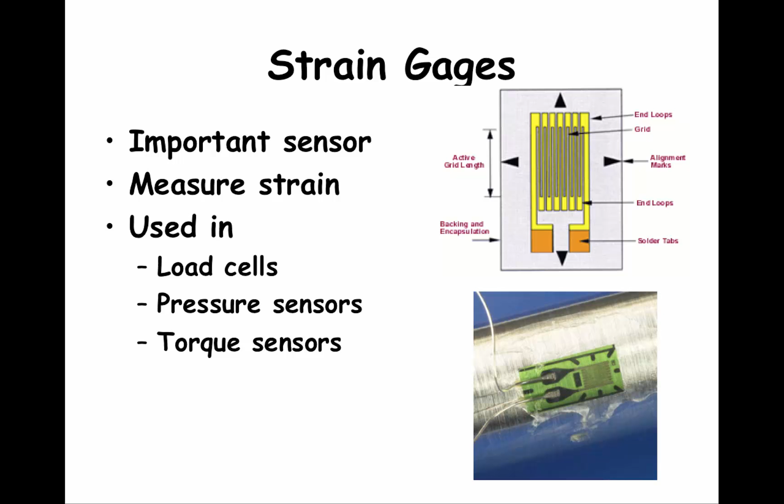Strain gauges are used to measure strain and find the stresses that materials experience using the stress-strain relationships discussed in the previous video. Strain gauges are also used in other sensors including load cells, pressure sensors, and torque sensors. The load cell used in the pressure lab used strain gauges.

Strain is defined as a change in length per unit of initial member length. Strain can be either tensile, where the member becomes longer and thinner, or compressive, where the member becomes shorter and thicker. Strain can be measured using piezoresistive materials, carbon-resistive, and bonded metallic wire.

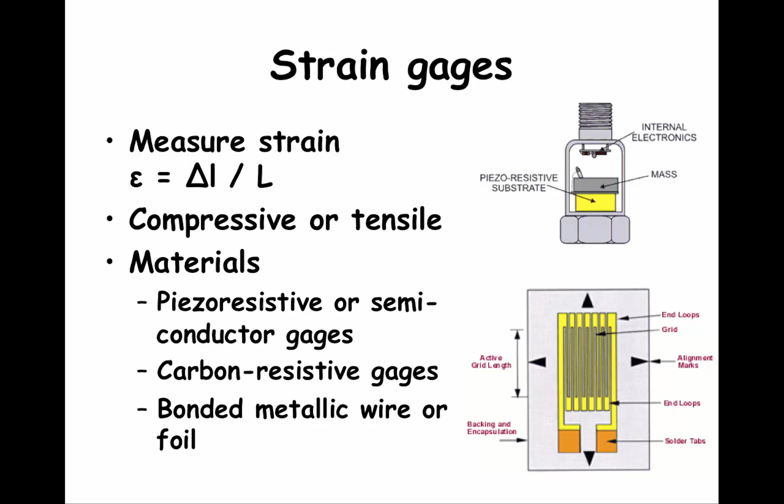Piezoresistive materials came out of the semiconductor industry. They are materials in which the resistance changes when the material is subject to either a stress or a strain. One of the pressure transducers in the pressure lab used piezoresistive materials.

The term bonded describes the fact that the gauge material used to make the active grid is mounted on a backing. Both the backing and the gauge are mounted to the surface at the point where we want to measure the strain. The alignment marks are used to place the gauge over the point where you want to measure the strain. The gauges are aligned to measure strain in the primary direction of interest.

The strain reading will be an average over the entire active grid length. Also notice the solder tabs. This is where small wires are soldered to the gauge so that the change in resistance can be measured.

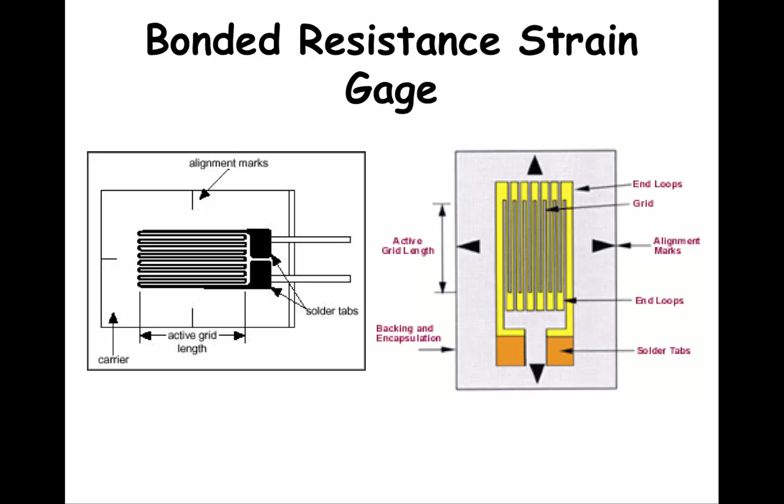The grid lines are like wires, and in some cases are actually wires. The grid lines get thinner when the active grid length is stretched due to a tensile strain. So in tension, the resistance is the initial resistance plus a change in resistance called delta R.

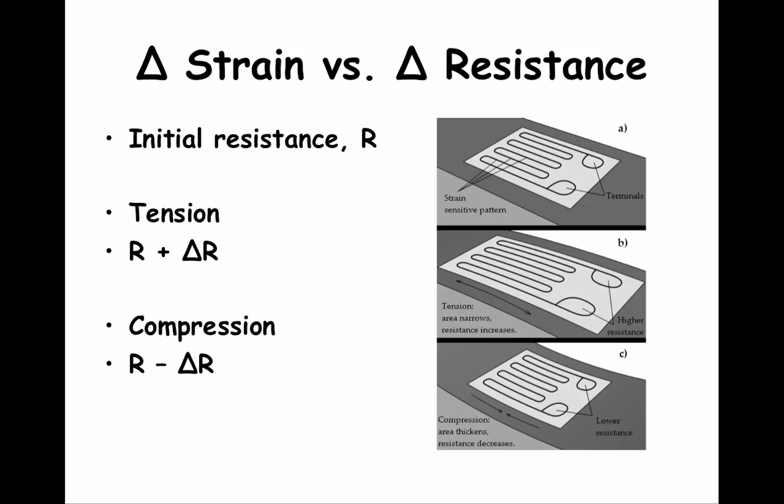In compression, the grid lines get fatter and thicker when the active grid length is compressed due to compressive strain, and the resistance is the initial resistance minus the change in resistance. Again, if the grid gets thinner due to tensile strain, the electrical resistance of the gauge increases. If the grid gets thicker due to compressive strain, the electrical resistance decreases.

The relation between change in resistance and strain is given by the gauge factor of the strain gauge. The gauge factor, capital F, equals delta R over R over delta L over L. The denominator delta L over L is the definition of strain, so the gauge factor equals delta R over R over the strain, given by lowercase epsilon.

Strain gauge manufacturers give us the gauge factor and the initial gauge resistance. We measure the change in resistance, delta R, and can find the strain that caused the change in resistance.

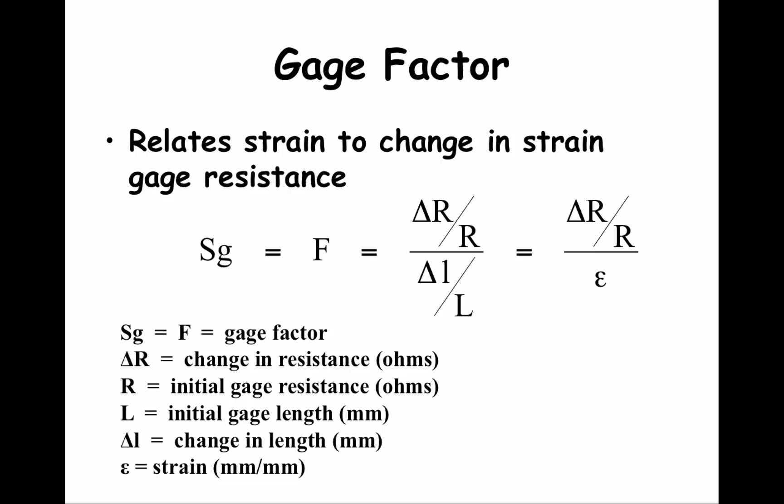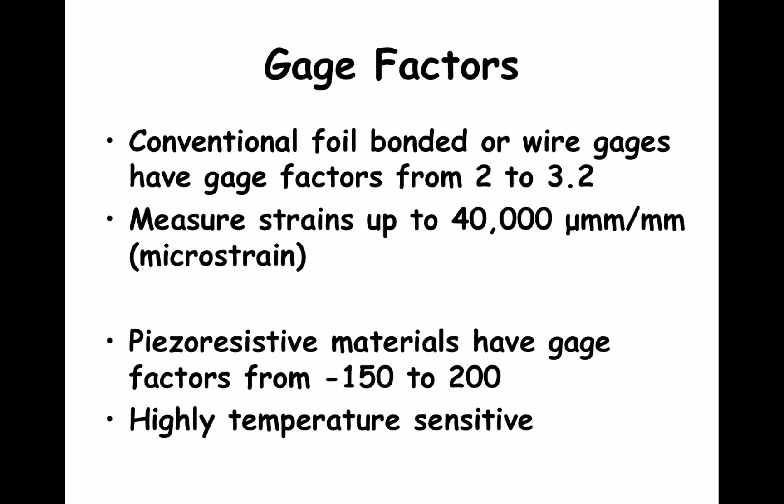Conventional foil-bonded strain gauges have gauge factors from 2 to 3.2. Piezoresistive materials have gauge factors from -150 to 200. The high sensitivity of piezoresistive materials comes with a disadvantage: the materials are highly temperature sensitive.

If you remember, the PDaq 55 and most other data loggers can measure voltage, but they cannot measure resistances and changes in resistance. To convert a small change in resistance to a change in voltage that we can more easily measure, we will use a Wheatstone bridge circuit. We will talk about the Wheatstone bridge circuit next time.

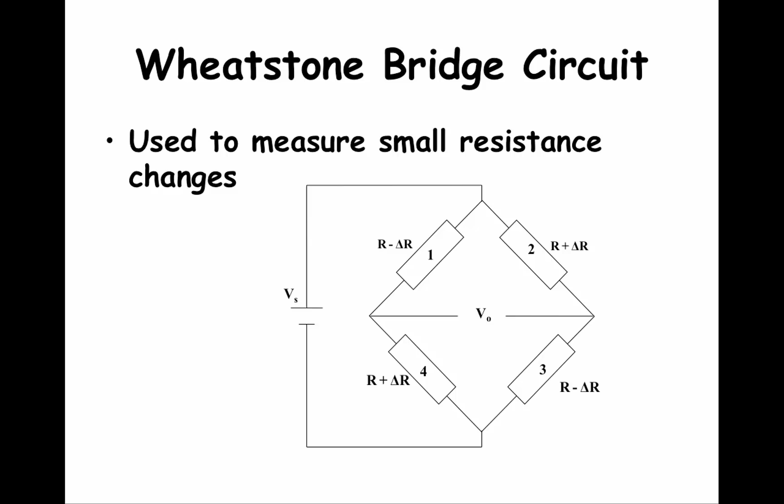Gauge length is important because strain gauges will give you the average strain under the active grid of the strain gauge. So if you want more of an average strain, you might choose a longer strain gauge. If you want the peak strain at a point, you will want to choose a shorter strain gauge.

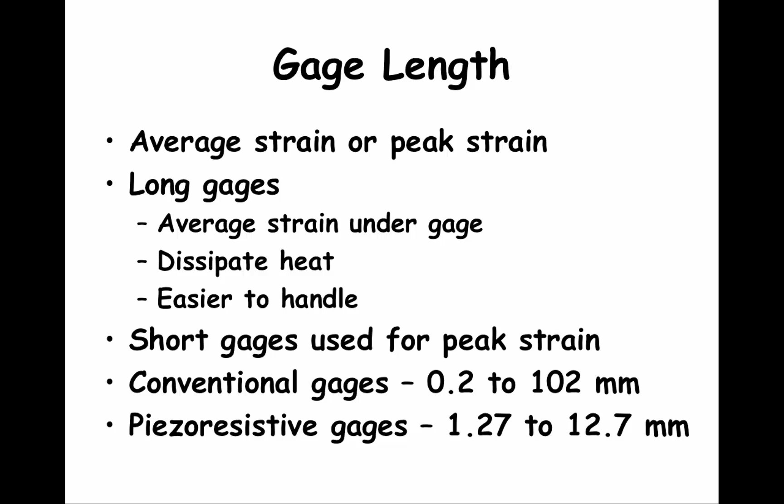Strain gauges can be made using different alloys. Here are 3 common alloys with comments about their strengths.

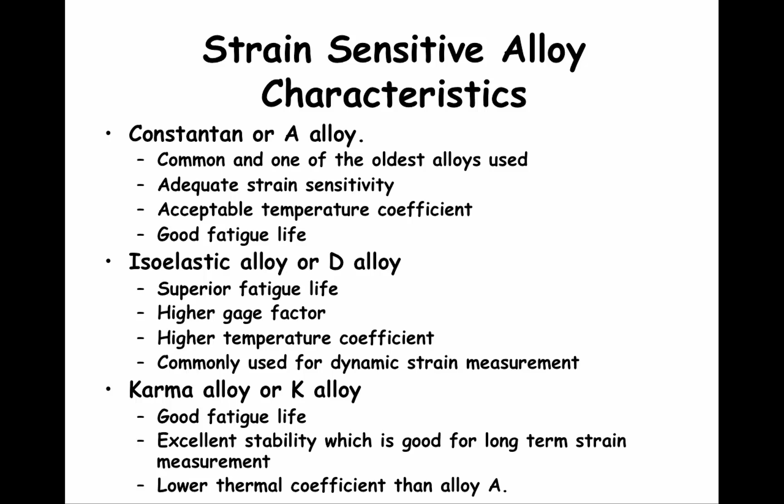Single strain gauges measure the strain along the primary axis of the strain gauge. Sometimes you want to know the strain in 2 or 3 directions. You can buy gauges that have 1, 2, or 3 gauges. A strain gauge with 2 or 3 gauges is called a rosette.

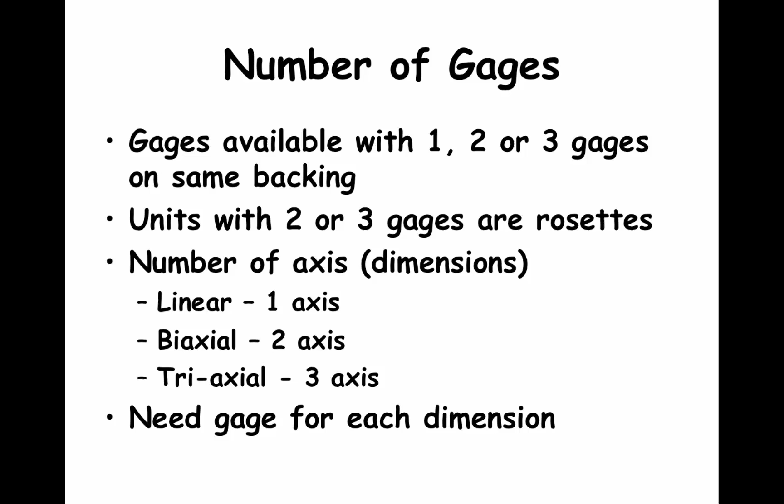When specifying strain gauges, you can specify the length, which we have talked about already, and the width. Wider gauges average the strain over the total length and width of the active grid.

In the previous slide, it was noted that a single gauge measures strain in one direction, along the primary axis of the gauge. But sometimes you want the strain in all 3 directions. To measure strain in 2 or 3 directions, you need to use rosettes.

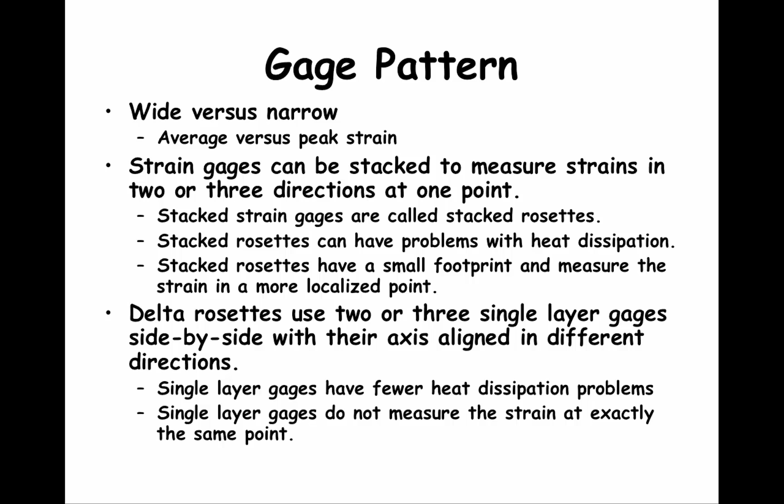There are 2 general types of rosettes. Stacked rosettes put 2 or 3 gauges on top of each other. Stacked rosettes can have a smaller footprint so they can find a more localized peak strain, but they tend to have heat dissipation problems. Each gauge will have some current going through it, and the current will generate heat and an apparent strain. The other rosette type is called a delta rosette.

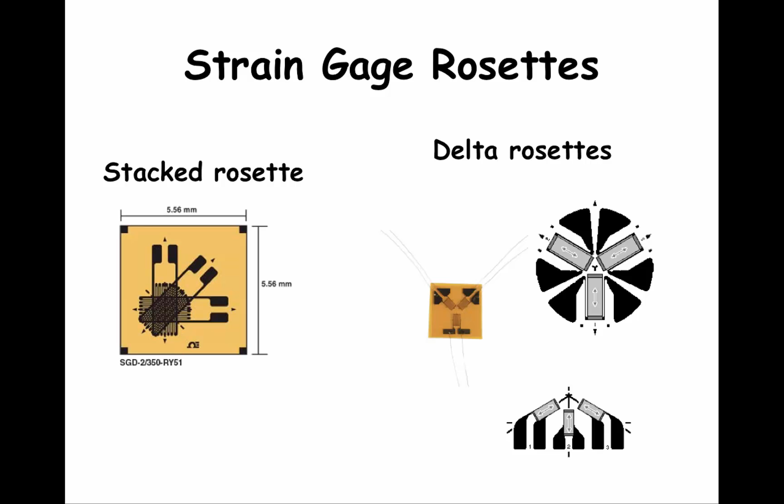Here are figures that illustrate stacked and delta rosettes. Stacked rosettes have the strain gauges stacked one on top of the other, and they measure strain at a localized point. Delta rosettes are side by side, so the strain is not exactly at the same point.

The self-heating that strain gauges have is the same self-heating issue that resistance temperature detectors have when connected to a Wheatstone bridge circuit.

In the previous video, near the end, we mentioned the temperature coefficient of linear expansion. We know from the concepts associated with resistance temperature detectors that resistance depends on temperature. The heat generated by the excitation signal of the Wheatstone bridge circuit will induce an apparent strain due to thermal expansion. Care must be taken when using strain gauges to prevent the gauge from being heated too much.

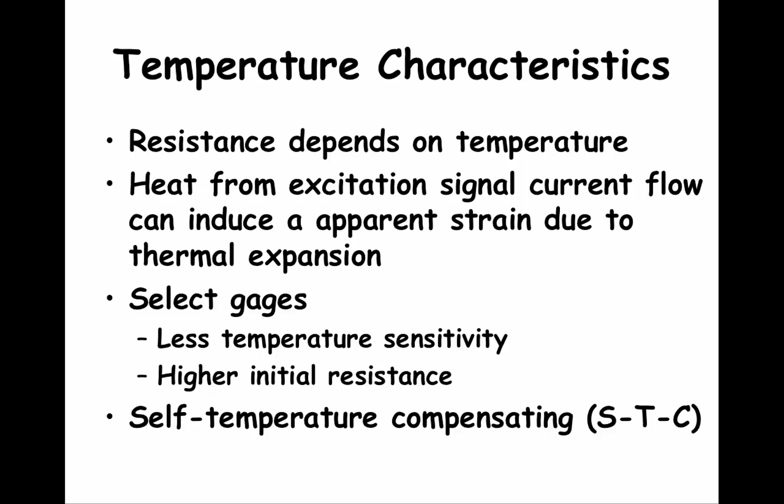Strain gauge heating can be managed by selecting gauges with less temperature sensitivity and a higher initial resistance. Many gauges now come with some self-temperature compensation. Another way to reduce apparent strain due to self-heating is to not exceed the maximum excitation voltage.

Strain gauge fatigue life describes how many times a strain gauge can be strained and unstrained before the gauge has a permanent change in the unstrained resistance of 100 microstrain or more. This permanent change in unstrained resistance is also called a zero shift, and it typically occurs around 1,000,000 strain-unstrain cycles. Fatigue life is important for strain gauges used in other sensors and permanent installations.

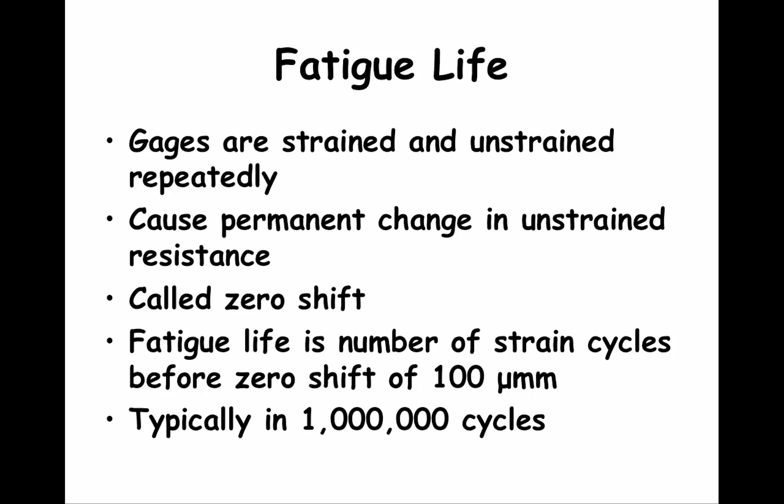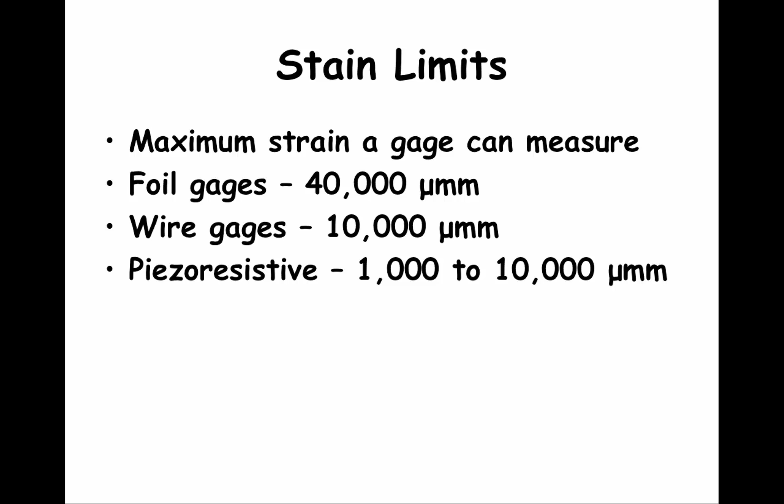Strain gauges have strain limits. Again, strain is the change in length per unit initial length. Piezoresistive gauges have the lowest strain limits, less than 10,000 microstrain.

Noise can be an issue. Shielding the leads and using filters can help manage noise. The apparent strain due to gauge heating can be a problem too. Apparent strain is managed by using compensating gauges, selecting gauges with higher initial resistance, and using the minimum excitation voltage possible.

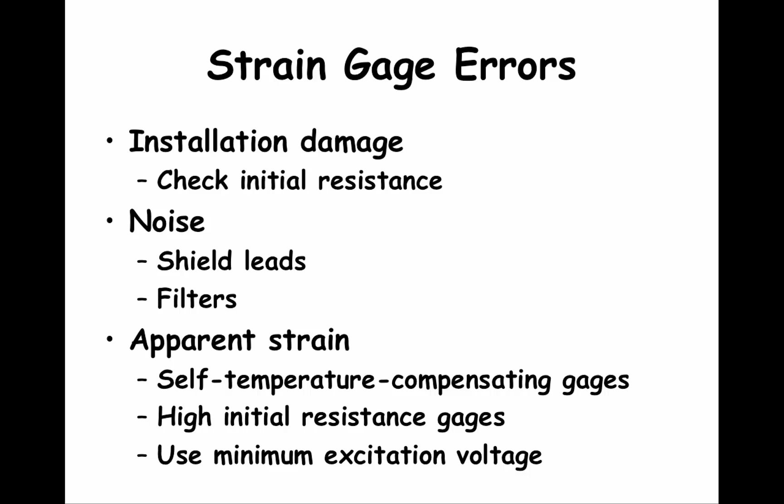Before we wrap up this presentation, I want to talk briefly about load cells. Many load cells have strain gauges inside, and load cells are used widely to measure force, weight, and mass. Load cells come in lots of sizes and shapes and are very rugged.

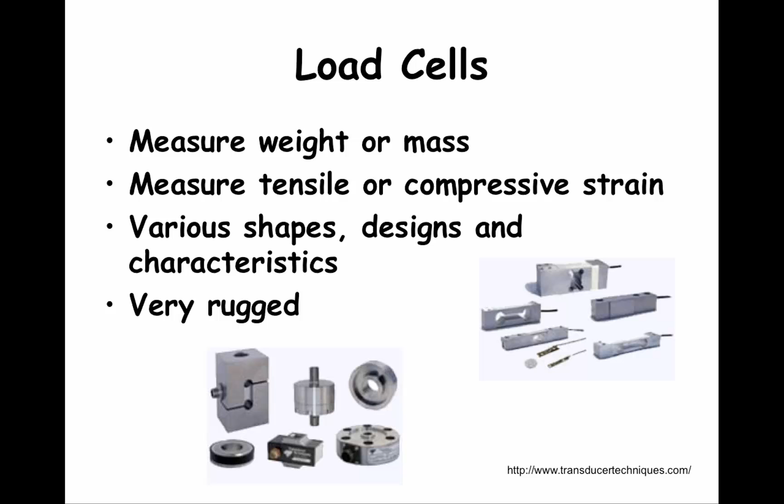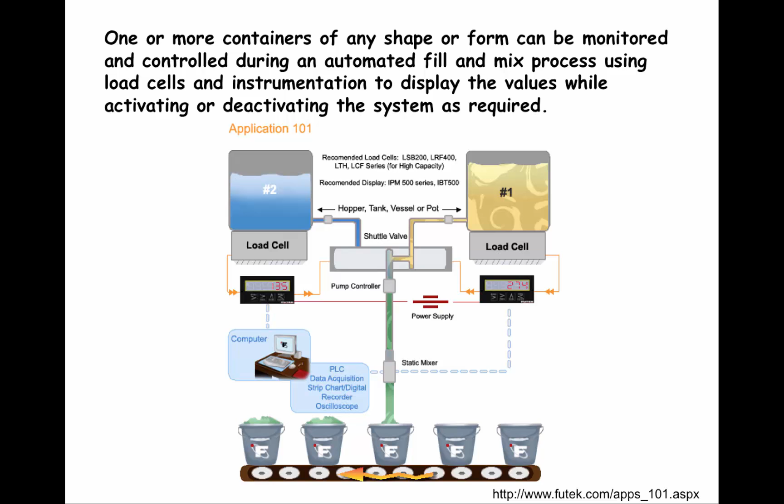Here is a little sketch from a load cell supplier that shows load cells being used to automatically measure the amount of material in the two containers.

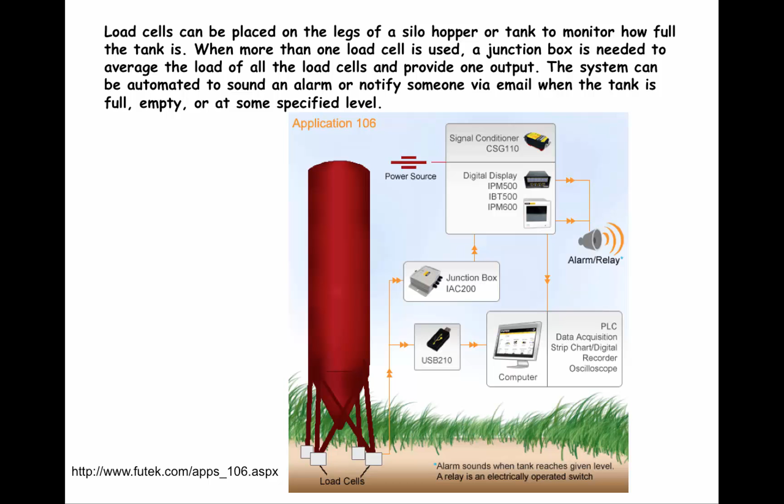This sketch from a load cell supplier shows 4 load cells being used to weigh the amount of material in the bin. Note that the note says an alarm goes off when the tank reaches a given level.

Strain gauges have error sources, several of which we have mentioned. Strain gauges are used in load cells, and load cells have several characteristics that we have to consider as well.